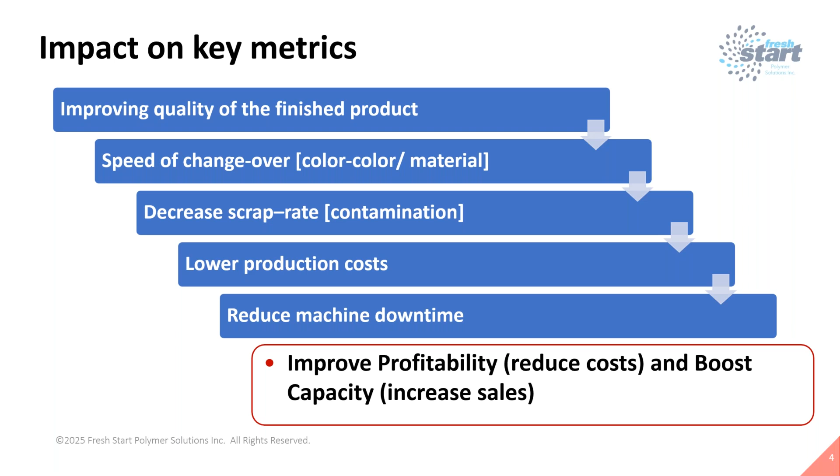How do you go about doing this, and how do you assess whether you have a system that's going to work for you or not? To do that, you just need to understand your process. Then establish a rubric, some form of format that you can assess a dollar value, so you can monitor and set up a cost structure towards that. Then turn around and measure your baseline. What are you doing right now? How does that fit into the rubric, and what does that overall cost look like?

Then look at evaluating an alternative system, comparing the two, and then determining what is the best value proposition for you as a company, and how can you use that to increase your bottom line.

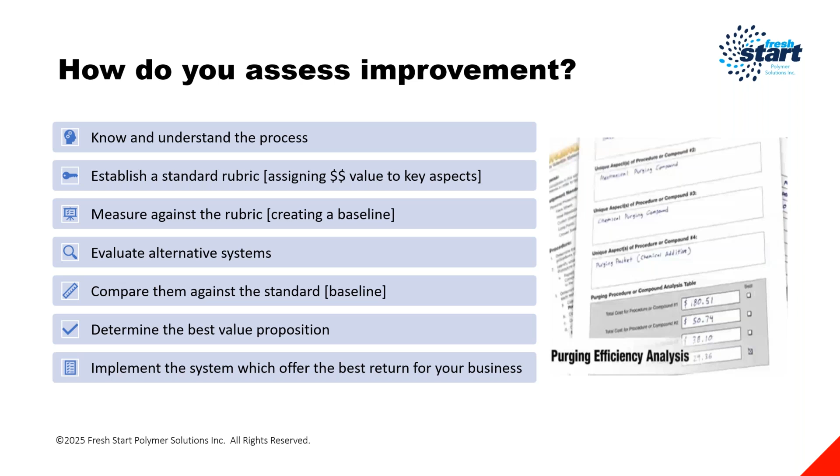So we're going to go into the 7 steps here that we've looked at in the value proposition process. The first one is understanding your process. We think that's critical for you to do, to take a look at and understand where you're going and how your system operates. You're going to look at the application, the products, processing temperature, the resins, the pigments, the additives, the production costs, quality costs, machine, and the size of the mold. All those play into this equation of trying to understand your total process.

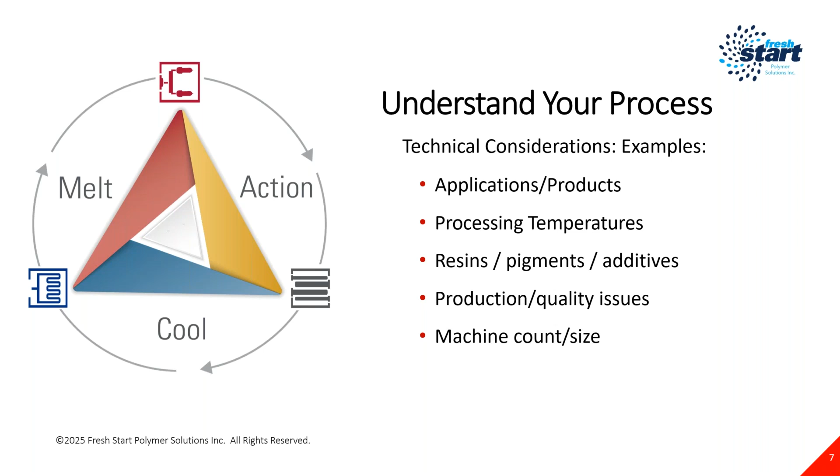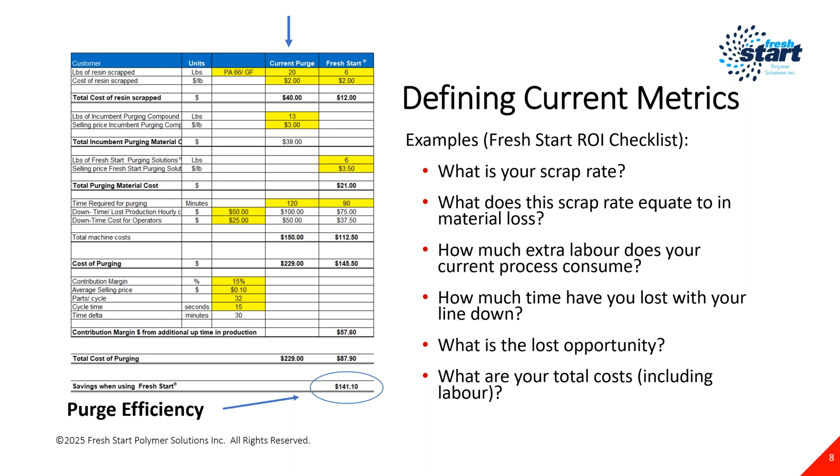You're going to look at things such as scrap rates, how much labor are you throwing at this to make this product effective or making the current incumbent system work more effective, how much time are you gaining or losing on your equipment. Is there an opportunity that's being lost? What is the overall cost? Putting all those things together and understanding, is this the most effective use of my equipment at this time, and am I getting the most value from it?

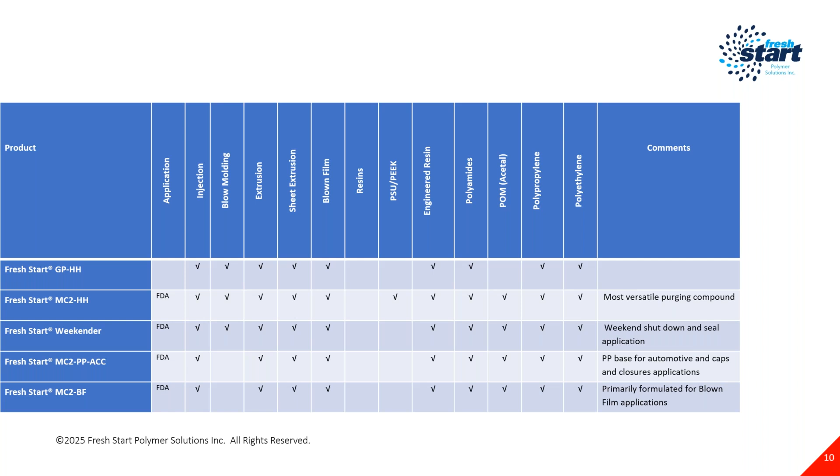So we're going to talk about selection of grade. This is getting into the products that we offer. We've got five of them. The most versatile and the largest product that we move out there is MC2-HH. It's a product that we're able to put into numerous applications, and something that probably we would start you off on. The other ones are more specific into the actual application, dealing with things like blown film or caps and closures. But if you're using everything else, this MC2-HH is going to be our focus product to work with.

Analyzing cost factors. So right now, we've heard, hey, I've got an in-house product, it's cheaper than anything you can offer us, it's got no cost to me. I can turn it around, I can recycle it, I can do whatever I want with it, but it doesn't cost me anything. The question we put forth to you, and we ask you to challenge yourself, is: is that a good use of my equipment and my resin compared to what a commercial purging compound can offer? I think if you evaluate yourself and you're honest in it, you'd be a little bit surprised at some of the things that pop out of that very quickly.

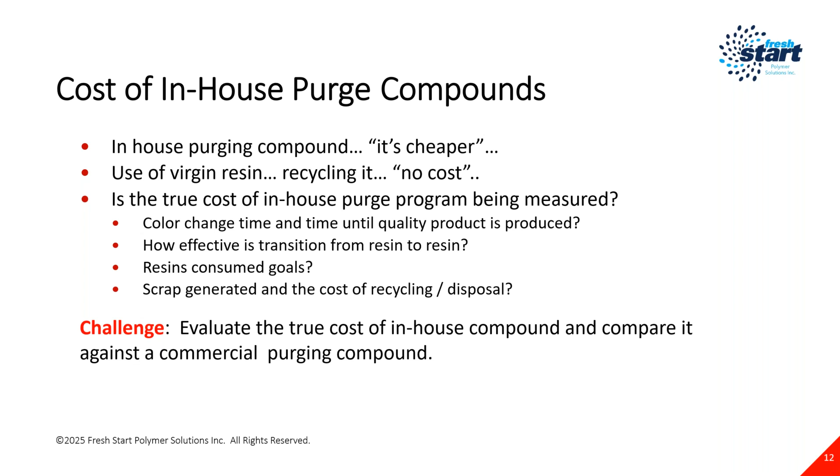This is an example of one that we've looked at, comparing purging compound versus a current or incumbent process. This shows you some of the metrics of how we would compare it out. So you're going to be looking at the cost of your scrap, the cost of your purge, the difference in downtime, and contribution margin - that's an opportunity that's been lost because you've lost 30 minutes of production that you could be using to make something else. What does that all add up to? This gives you an idea of what that finished checklist would look like, and what you could possibly see as an up or down associated with total cost of using a purge.

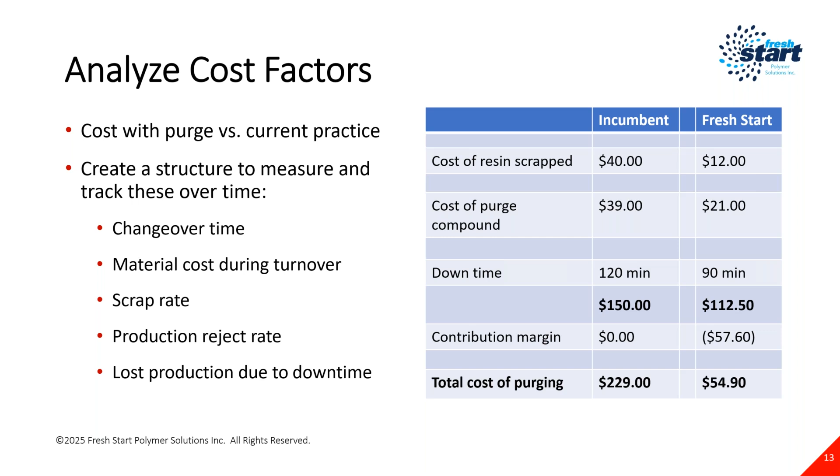Well, this is a very interesting thing. We've done so much improvement - if you talk to all the major die manufacturers, Mold Masters and others, they've done numerous improvements of their manifolds and helped create more efficient systems and optimize speeds. However, we're still stuck with a whole pile of challenges out there. We've got challenges coming from resin, from pigments, and from all kinds of other additives that are beyond everyone's control - they're moving, they're not stagnant. We're not able to use them in a mold consistently and say this is going to work this way all the time.

One of the biggest challenges we're seeing, in some applications like toys, is that we can't use heavy metals anymore as our pigments. So now we've got to go over to organics. Well, the challenge with organics is they're not heat stable, so that's going to create a whole problem with our quality. So how do we deal with that? How do we move forward with that?

Then we've got zero waste legislation impacting us - whether it be up in New Jersey, in California, or on the West Coast - those are coming at us and we will have to work with them. And while we're dealing with them, we're going to have some struggles that we'll have to figure out how to deal with. So these are the things that are coming at us, where we believe purging compounds have been effective and will continue to grow to address these issues.

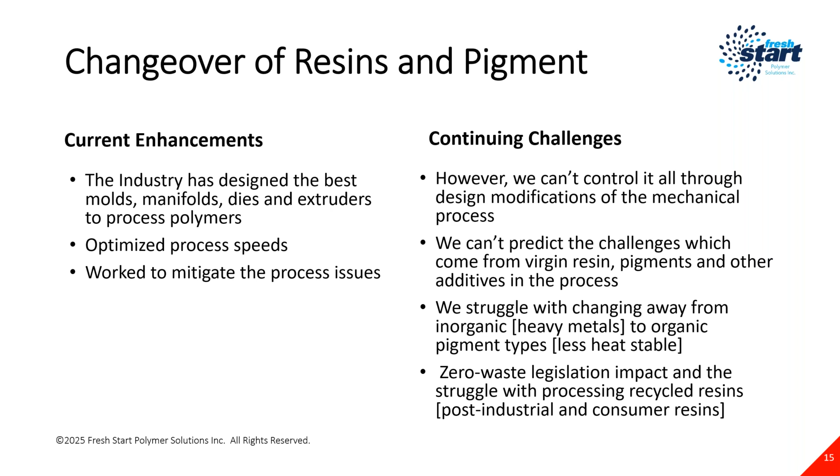So here are the most critical segments. We're going to look at the injection molding machine right now.

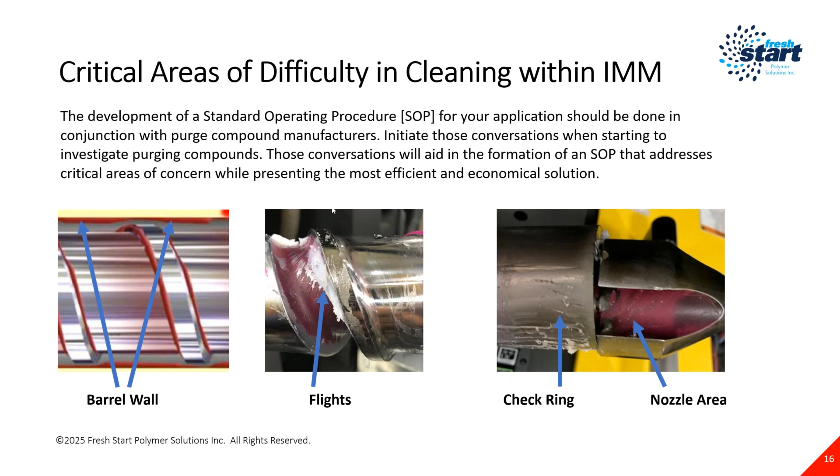So we talk about the path of least resistance. Here we're dealing with the shear stress that goes on a polymer, and we'll get into some of the engineering principles in a second. But what happens is we end up with material ending up against the wall, between the wall of the barrel and the flights of the screw.

This is an area where we end up with that material becoming stagnant. It doesn't move as quickly as we want. We've got temperatures on the outside, and we'll end up with that particular material, for lack of a better word, burning, or oxidizing. And when that happens, it starts to adhere to the barrel itself.

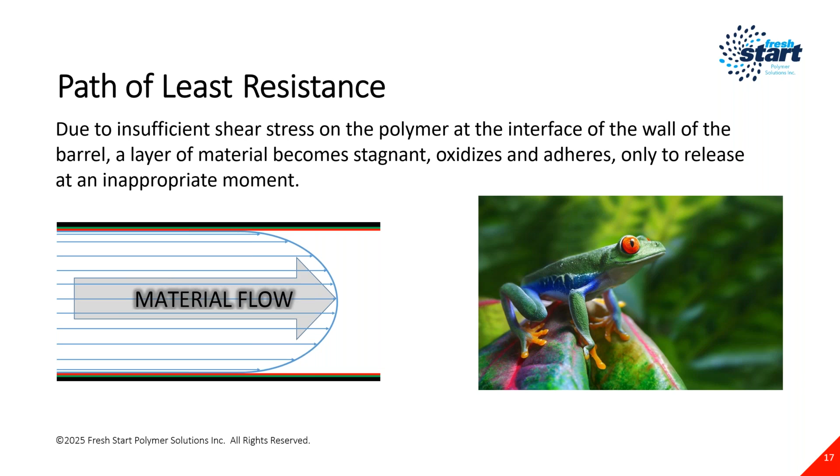The biggest challenge we have is it ends up releasing at the most inappropriate moment, and you end up with unique colors coming out in your product. You'll end up with splay showing up that you didn't expect, all kinds of other quality-related issues, that take you down and have you questioning what you need to do to maintain the quality of the product that you're selling to your customer.

All these things we've been talking about really come down to about 3 or 4 key properties in engineering and fluid dynamics. Bernoulli's principle is one of the key ones that we look at, as well as the Reynolds number. Between the two of them, we try to balance them to be able to generate the best product for your needs.

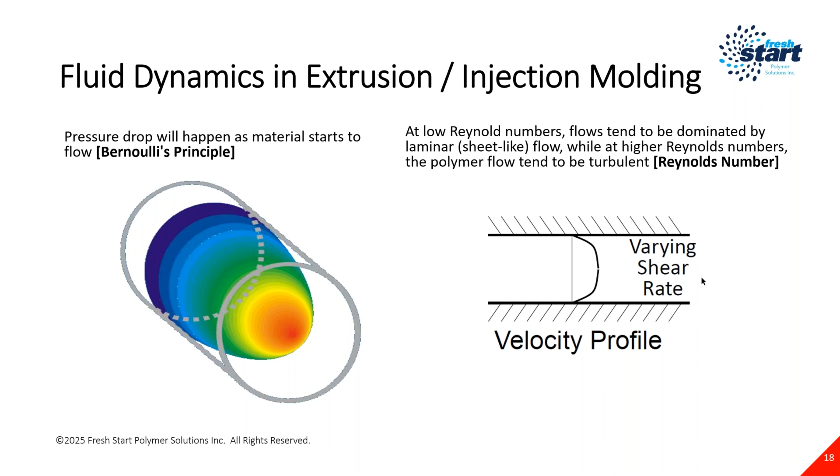When we talk about Reynolds number, it's very important. The key with Reynolds number, when we formulate our products, is to create the most amount of turbulence in an area of very, very low flow. That's the most critical thing that you need to be able to achieve.

So you need to have a very high Reynolds number, and that will give you the ability to then polish into those nooks and crannies and effectively remove the contamination. It works well on polishing the surface of the barrel. It works on the back side of the screw. It works quite well in the hot manifolds, or manifolds in general. It's just very good and effective in areas of low flow.

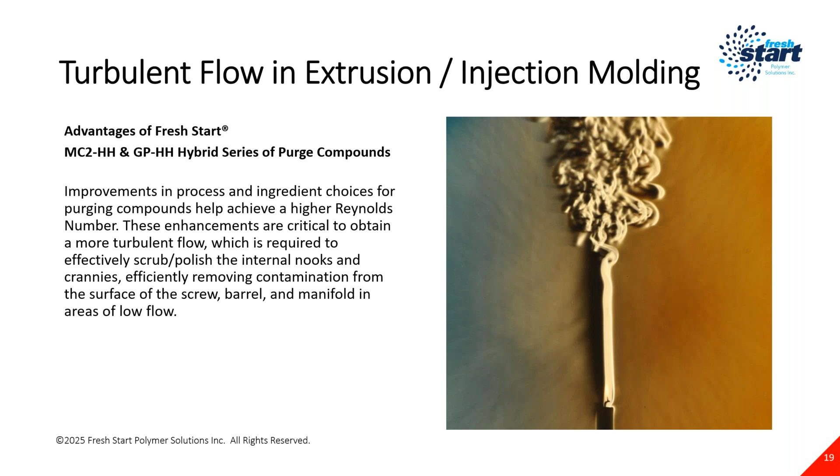Now, here's another thing that we do. We all are very good at this. We understand that as we increase the temperature, we can reduce the viscosity and we can be more effective in filling our tools. That's great.

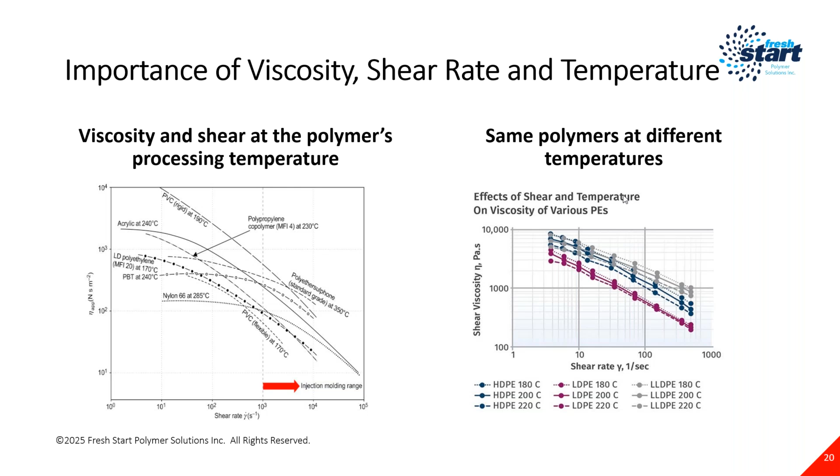On the right-hand side, what you're showing here is the effect of temperature on viscosity and shear rate. So if you drop the temperature on the resin by 20 degrees Celsius, you can actually increase the shear rate, and you can also increase the viscosity, thus allowing you to push some of the garbage out that you're trying to move. So that's showing a little bit of the dynamics between resin to resin, and same resin dealing with the temperature itself.

What does this mean overall?

So here I'm looking at a situation where I've got a changeover and how it's going to be very costly for me. I'm trying virgin resin to virgin resin, I'm not adjusting the temperature, and I don't have the viscosities in the range that I can push one product out versus another.

And it's going to cost me. Every changeover I do, it's going to be about $218. Well, you think, that's not too bad. Then I'm looking at one changeover per day, over 5 days a week, for 48 weeks a year.

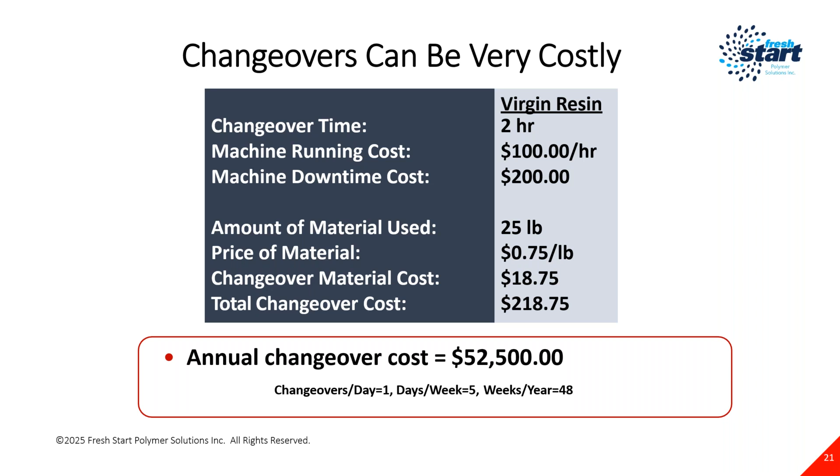So that's going to cost me $52,000 towards my bottom line. That's money I've basically given up because I can do something else with that time, and I can probably sell a product that I can make a lot more money with. So those are the types of things we look at and say, what is the opportunity lost that I can gain to increase my bottom line?

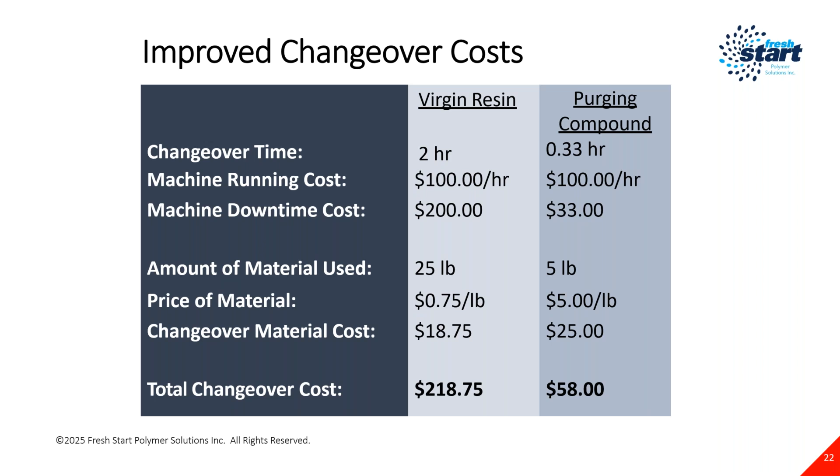But I'm still saving money. At the end of the year, with a purge, there's $38,000 more in the coffers. Now that's just dealing with one change, it could be just one machine. You could have 15 machines, but you're looking at changing maybe 2 or 3 of them a day, and that number goes on, and it can be multiplied multiple times out.

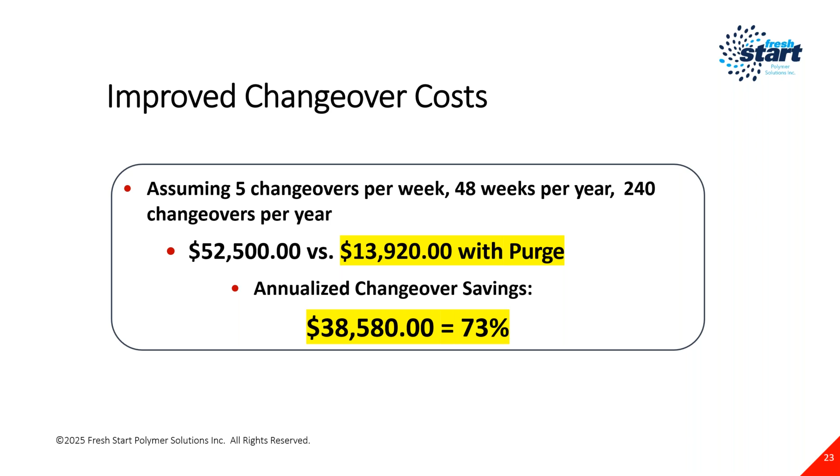Preventative purging, I should say. Well, here, people will say, I'm running the same product and I don't need to purge during the middle of it. I'm going to run it for 2 or 3 weeks. Why am I even considering this?

Well, this comes into understanding quality. The quality of the product you're making and keeping an eye on the overall surface issues that you may have. Just dealing from what we were talking about earlier, a pigment that is starting to burn in the equipment, or you've introduced some recycled material, or you're regrinding the sprues and putting them back into the mix.

All those things can cause challenges, creating areas where you will see black specks being introduced, some color streaking maybe there, whatever. These are some of the challenges you see within the process itself as you run it for an extended period of time. At that time, what you need to do is monitor that through your quality department, keep an eye on it.

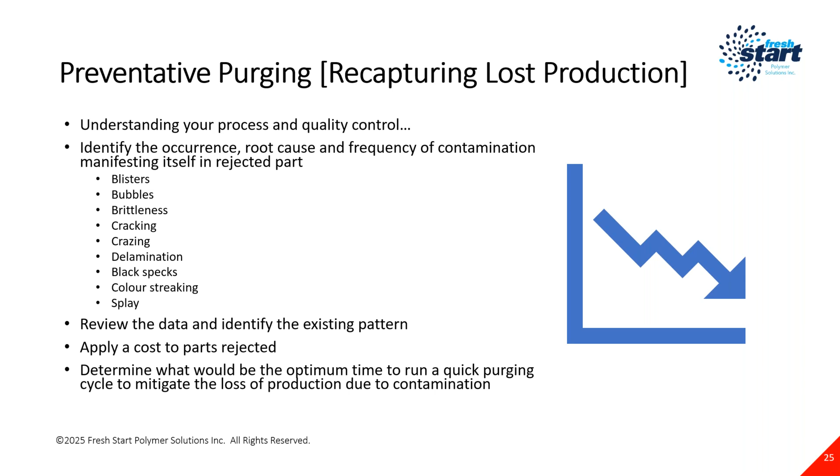In this particular application, the customer kept on running. He ran for 2 hours longer than he should have. He created 2 hours of scrap, versus he could have turned around and just dropped the purge directly into the mix, shot the material through the manifold, and come out at a cost of about $50. So he's looking at a savings of around $240.

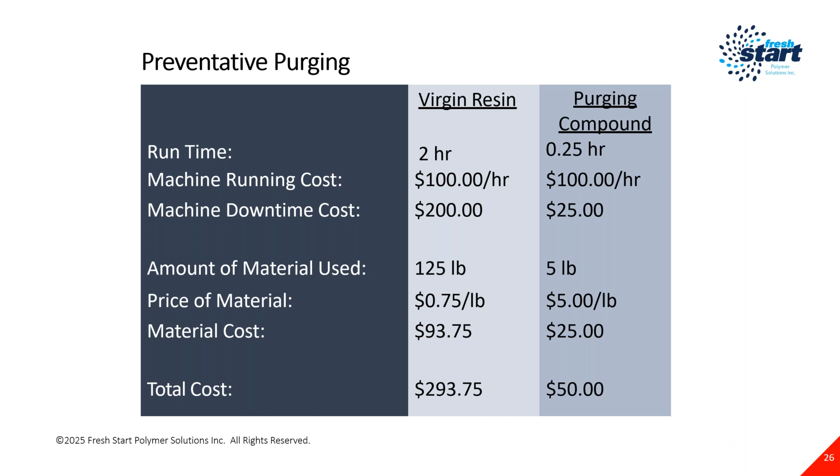So what does that mean overall? You've gained time, you've reduced scrap, you've increased your return on working capital. And someone will say, what does that mean? It means that I'm making money on every piece I'm selling.

I've reduced the power consumption per good part. So the more good parts I move, I'm not shooting extra, I'm not spending more time operating my equipment and producing bad parts. So I'm making more good parts per overall power consumed in the plant.

Same thing with overhead. I'm also, because I'm being better at using the power consumption and overhead and all the other things, becoming more sustainable and reducing my carbon footprint. These are all good metrics to sell to your stockholders and also to your customers, to say I'm being responsible and sustainable.

It doesn't have to be anything other than that I'm working ahead of the game versus trying to play catch up.

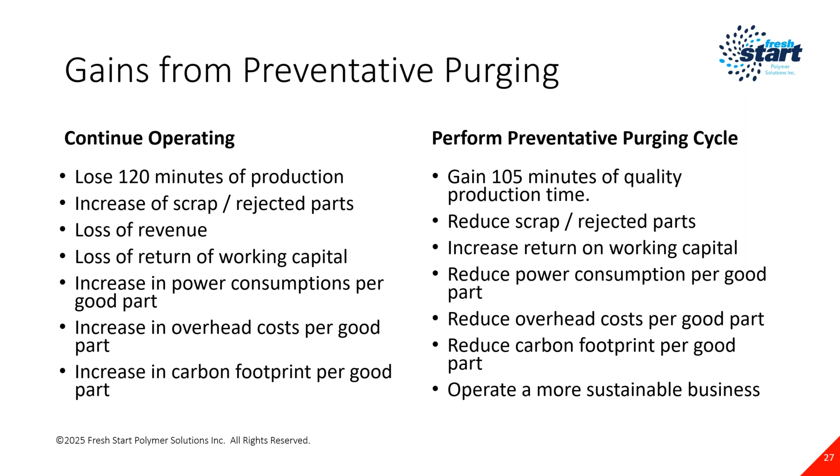Shutdown and sealing. We all like to go on holidays and take time off, whether it be during the summer, at Thanksgiving, over Christmas, whatever. We need to give our employees a break.

So what do we do at that time? We turn around and we want to shut down our equipment. We want to do it in a way that when we start it back up, we're running it in the fastest manner. We're not dealing with all kinds of black contamination or startup issues.

By using a proper sealing purge, you're actually reducing the possibility of oxidation of the material that's along the wall of the extruder, whereby air can get in. As you're taking the heat down, they're slowly coming down and slowly going back up again, and they're going to turn around and oxidize and burn some of that material.

If you have it completely filled with a purge compound that is heat stabilized, then you're going to mitigate that occurrence and have a much better product coming out. That will help you dramatically be up in manufacturing much faster and be able to take more opportunity to produce more product as soon as possible.

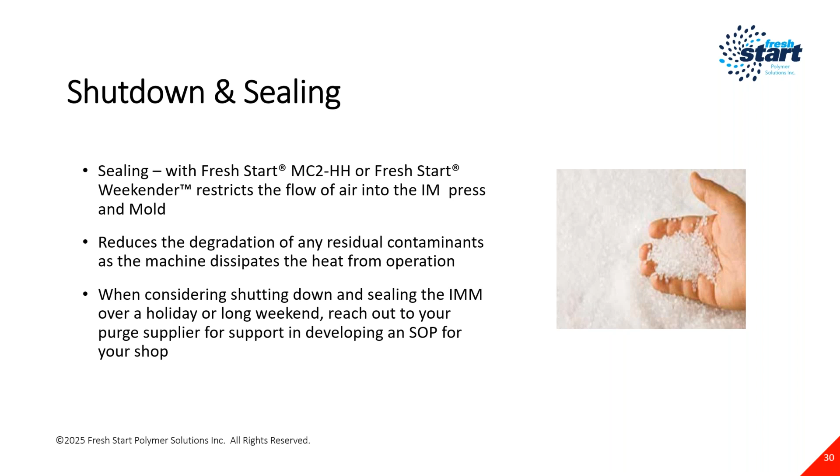So what have we said up to this time? With a purging compound, you have the opportunity to increase production, reduce scrap, reduce rejected parts. You're going to obtain faster resin changes, color changes, faster mold changes. You're going to increase your profitability and revenue through production. I think those are all good things that I like to see if I'm running my business.

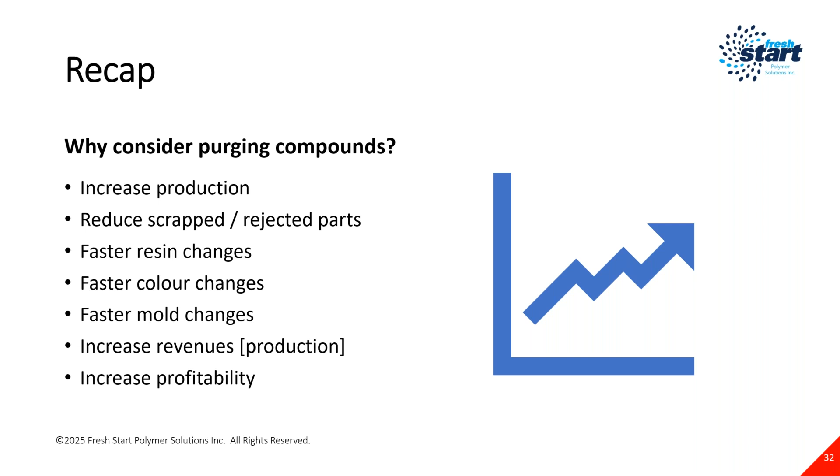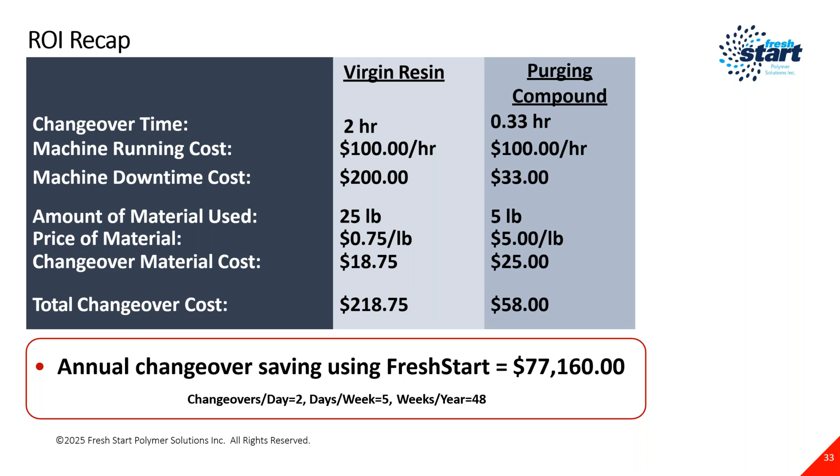So we go back to what we talked about earlier, and this is a recap. Basically, the biggest thing you're going to save on is time, and with time comes money. So that's the key. You also have opportunity costs to take into consideration here, which gives you the ability to manufacture more material faster and more effectively for your customer.

So I'm going to give you, I've got 5 case studies, or actually things that we've actually done in the market out there, and I just want to give you an overview of it.

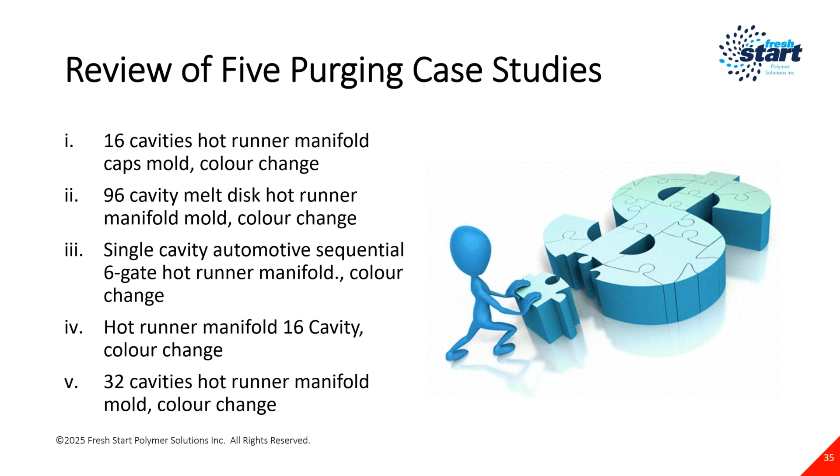This first one we ran at Mold Masters. We did an evaluation using a third party that we trusted to do an impartial assessment for us. What they did is look at - we worked with a 16 cavity tool for a cap, running a hot manifold, or runner manifold. And what we were looking at was, one, a resin to resin push, to see how effective that was.

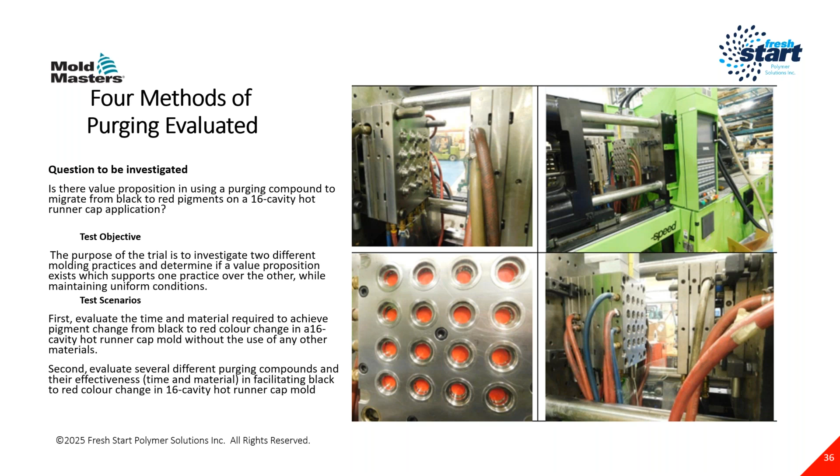Then the second thing we wanted to do is take a look at our material versus 2 of the market leaders of purges in the industry. We wanted to evaluate that and see what that all came out as.

One of the things I want to point out here, in terms of the conditions we ran under, is the gate size. The reason we wanted to look at the gate size is because we did all molding through the tool, and we actually molded parts with the caps, with the purge going into the caps.

After we ran it purge to purge, we used just a little over 5.5 kilos of material running straight resin push to push, and we were not 100% satisfied with the product. At that point we stopped and decided to move on. That cost to us in that process was $12.

When we looked at Fresh Start versus the 2 competitors, we used the same amount of material in each application. We did the same number of purge shots, and then we went right into introducing the actual resin, and then seeing how effectively we'd be able to make a product that was acceptable.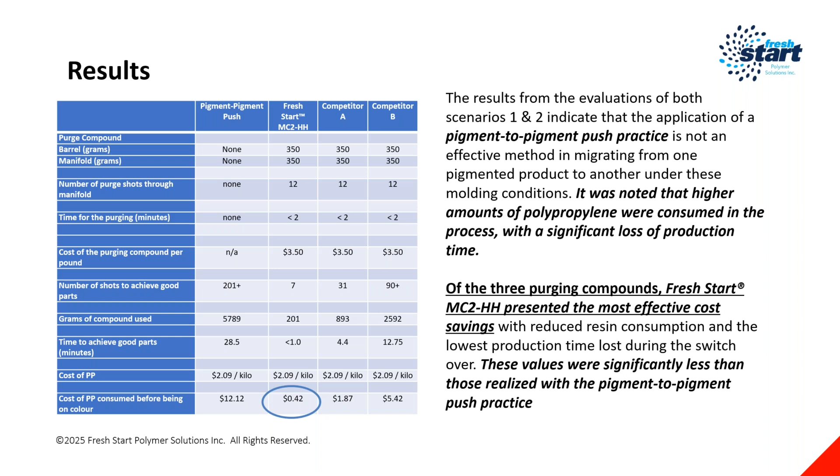This was another interesting one. We had a customer doing dark colors using fluorescent pigments. The customer was having challenges going from a dark color to a white pearlescence. What they were doing is pulling the screw and barrel and turning around to clean it—an extended amount of material was lost. They would make over a gaylord full of scrap product when finished, which they'd sell off since they couldn't use it themselves.

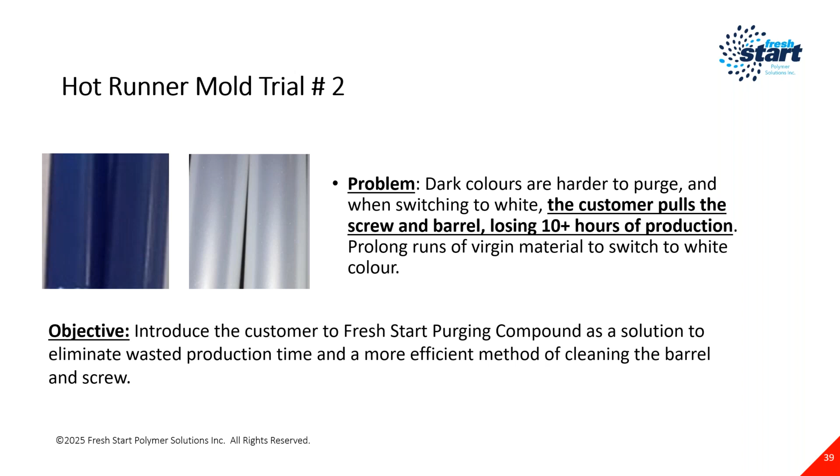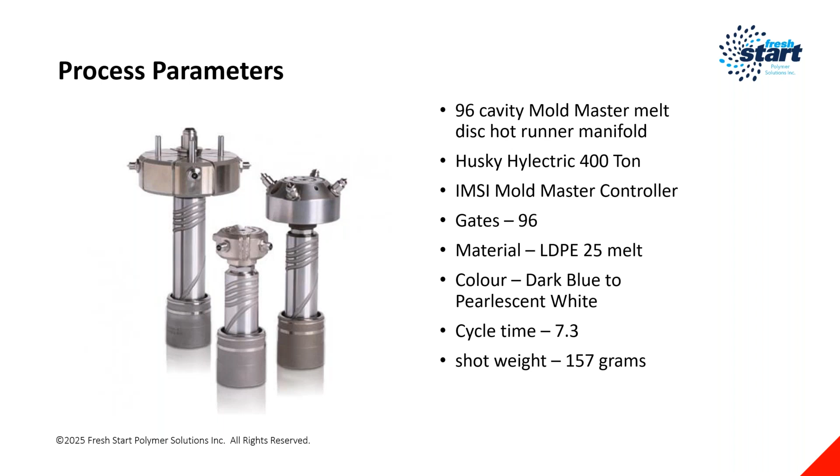In this application, we were working with a 96-cavity melt disc hot runner system from Mold Master, and the cycle time was basically 7.3 seconds, with a shot of 157 grams. What we did is mold the part right through the melt disc application. We ran the trial and very quickly were able to get everything up and running.

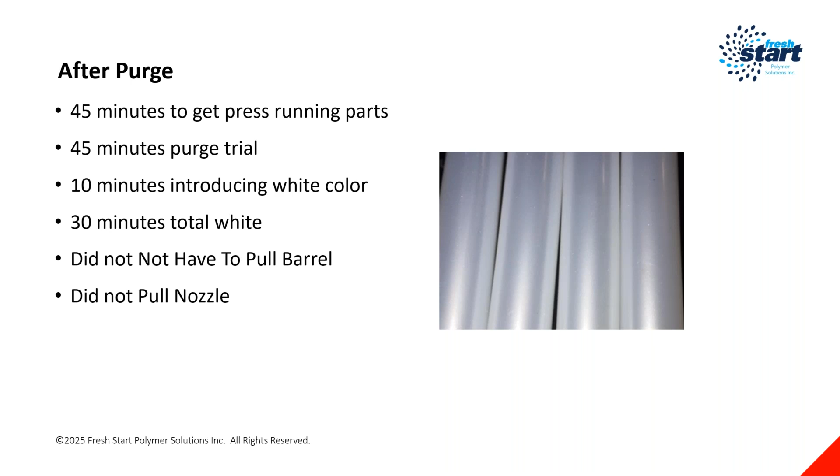Within 45 minutes, we'd finished the purge. We introduced the white color, and after another 30 minutes we were right on what was considered acceptable by the customer, and we moved forward.

Overall, in this application, we generated more than 4,000% less scrap. We're in and out of the color change more effectively, and we gave the customer 10 hours of additional production time that they never had before.

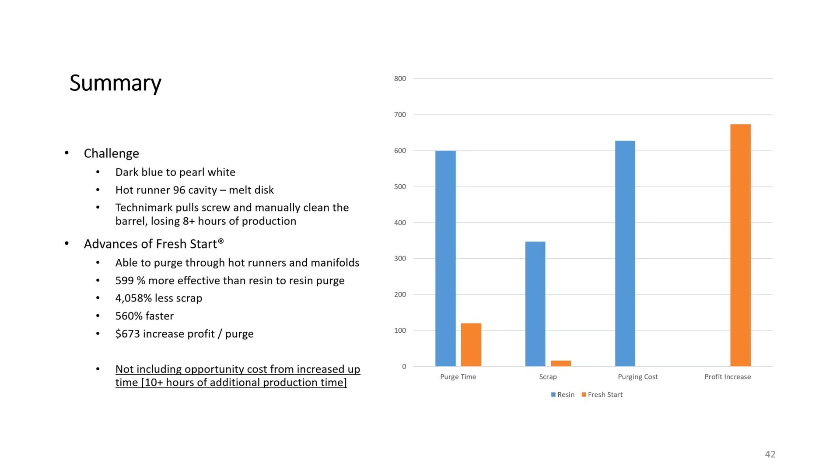This was a very unique one—a sequential gate hot runner system for a 5-pound truck bed panel for automotive, with lean manufacturing. They were going from dark colors, basically black to beige, doing multiple color changes because they were working off the automotive production schedule. It would say, 'today you need to make 10 of these and 5 of those,' and that's all they made. The next day they'd make exactly what was required for production, with no opportunity for long runs, so they were doing multiple color changes.

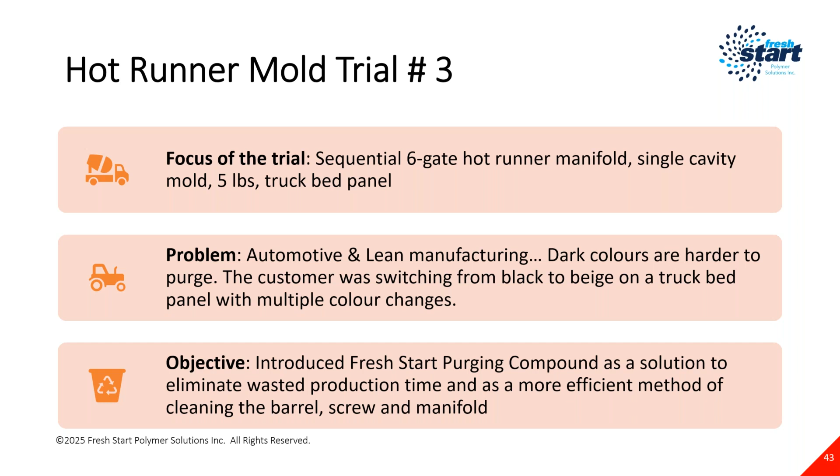Here's the outline of the format we were running, and here's the results. We ran 25 pounds of purge through the barrel, then purged through the mold another 20 pounds for a total of 45 pounds, at a cost of $3.35. The competitor was using 75 pounds at a cost of $2.10, and another competitor was using 100 pounds at $3.15.

At the end, even considering the difference in unit cost of the purge, we were still very competitive. However, the most important thing in the equation was how many parts the customer had to make before it was considered acceptable. After the 4th shot, on the 5th one they were putting that into the box and shipping it off to the OEM. That was the big impact we had on this application.

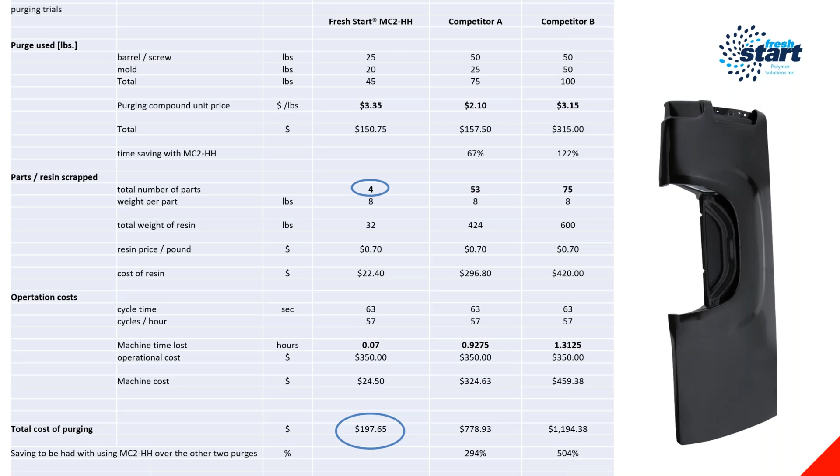So the amount of resin scrapped was nominal relative to the others, and it had a huge impact on the customer's ability to do more production with the amount of equipment they had.

Comparing ourselves to competitor A, then competitor B, there was a substantial change in the equation. You're looking at downtime of a fraction of an hour versus close to an hour or an hour and a third for them. That's huge time in the automotive business, particularly when looking at how to increase profitability. This gave them the opportunity to do a lot more with less, putting more money on their bottom line.

This was a toy block application. It was a 62 cavity mold, and they were using liquid pigments. Cycle time was 13 seconds, and the shot was 32.

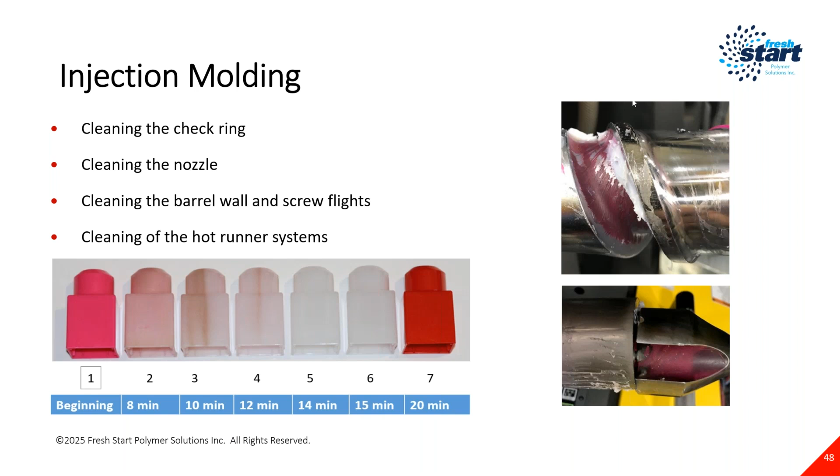Now, this is not including the opportunity cost they had, being able to make more with less. At this time, they were looking at potentially buying 2 more injection molding machines, and with this change, they found they did not need to move forward with that acquisition.

Last one we have here is another example, a dark color going to a lighter color. The customer again was pulling the screw, and again facing a minimum of 8 hours of downtime.

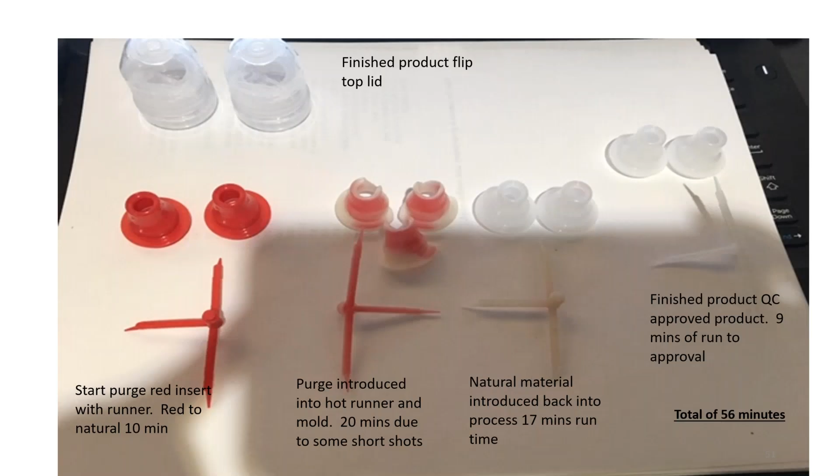Here's what they started off with. On the left-hand side we have the original product being shot. Then you see the color as it molds out, you can see the tan color, that's our purging compound reacting and taking that product out.

Then translating at 7 minutes, or 17 minutes processing, we're now into a clear. At that point, the samples went off to QC, where they did 9 minutes of their own work on it, a total of 56 minutes from beginning to end. They came back and said, yes, I'm interested in looking a little further into this.

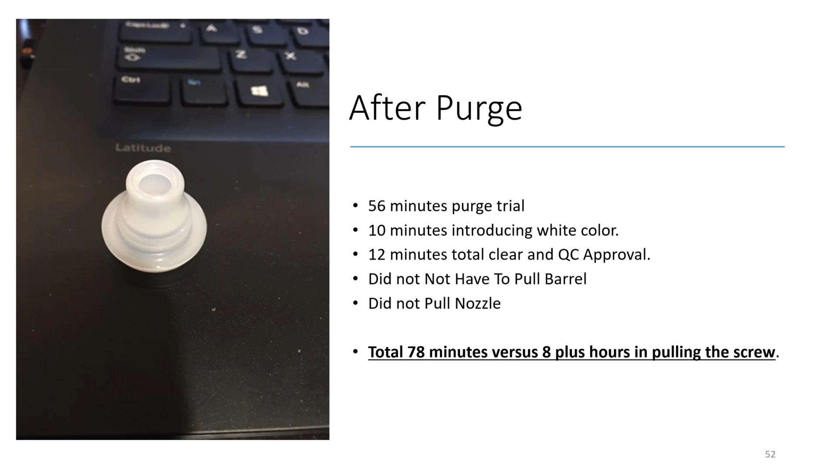So just on the purge for them, it was over a $2,000 savings moving from pulling the screw versus using a purge in the application, as well as the sheer time saved. Sometimes they're pulling the screw or doing a resin-to-resin push 12 to 24 hours, it was all over the map, and they figured out that by using a purging compound, they were able to see significant savings.

What we did here is help them by writing an SOP for their internal operations, so they could take it onto different product platforms, and we're constantly working with them to develop other SOPs for other applications.

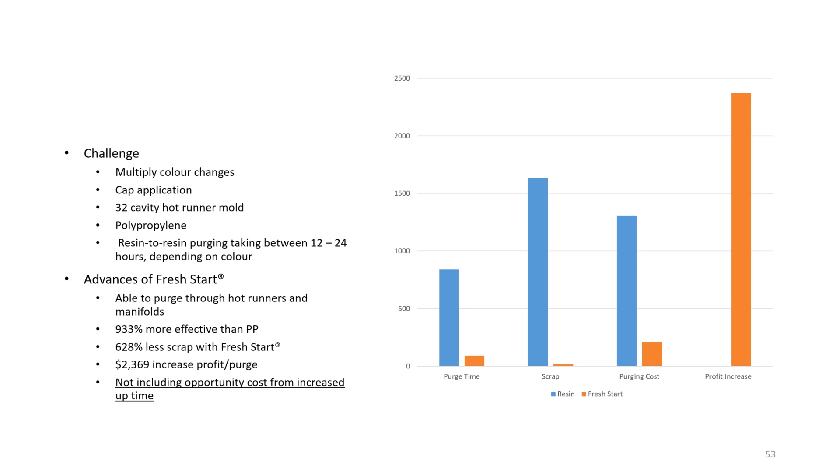So why do we think we stand out? Is it that we purge through injection molding machines more efficiently? We also purge through the runner and the manifold together, we can reduce the total amount of scrap, and we can help overall increase your profitability and increase the opportunity for you to do more with less on your equipment.

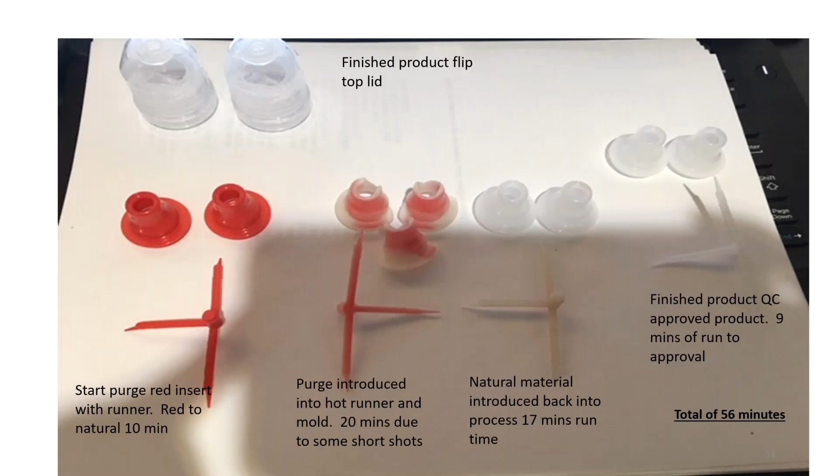What happens is you take your current material, let it exit the machine altogether, and then follow right in behind and seal up the total barrel with a purging or sealing compound. You make sure it fills the top portion of the neck in that area. The reason is that air gets in, and with the material already coating the barrel and screws, it will seal that up so air can't get in and oxidize it. If it oxidizes under the heat of the system, it will burn. When you start the material back up, purge out the sealing compound, and put in your next product, you'll see black specks and quality issues that continue for some time afterward. So using a sealing compound helps mitigate the loss of time at startup following an extended shutdown period.